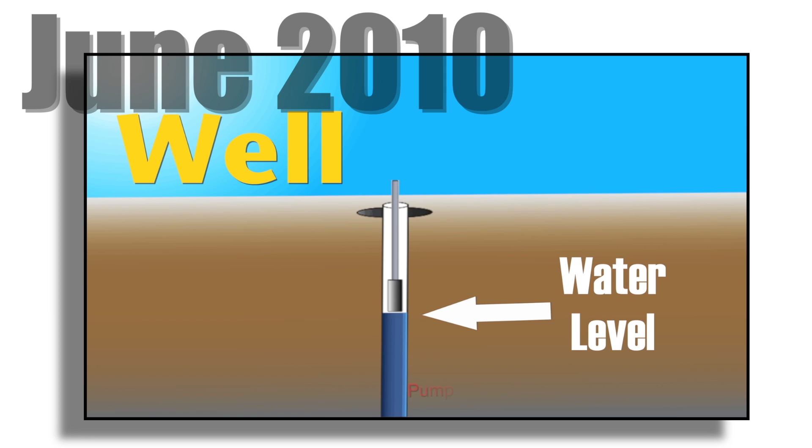In 2010, we began reporting on our dry well and what we did to fix it. Here's a flashback: we discovered our well pump could be lowered, so we added a 20-foot pipe link, and it worked for 3 more years. With the drought continuing, we now face the same dilemma, and this time we can't lower our pump because we're nearly at the bottom of our well.

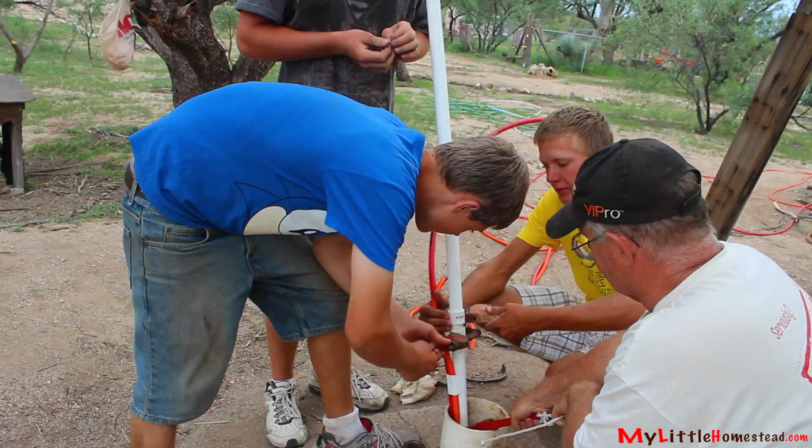In the spring of 2013, we began our 2-year journey to find a solution to our water problem. The first idea was a concept we learned online: dig a well using air and water.

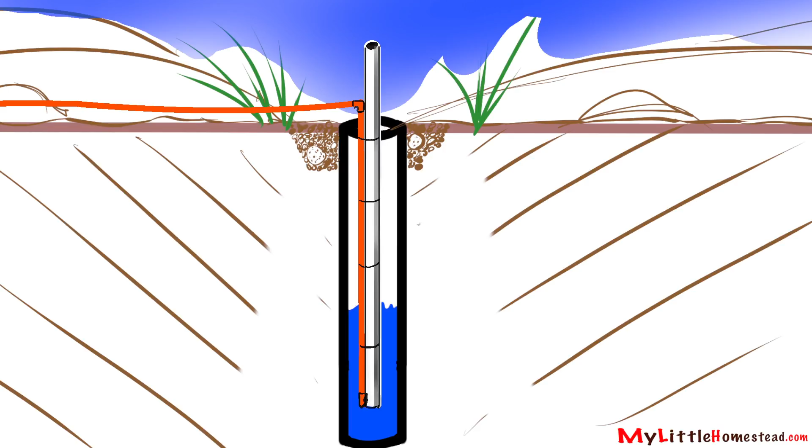A PVC pipe with an air hose attached to a compressor is dropped to the bottom of the well. Water is added to the top. The section at the bottom works like a vacuum, pulling up the debris, and the water carries the dirt up the pipe and spits it out the top.

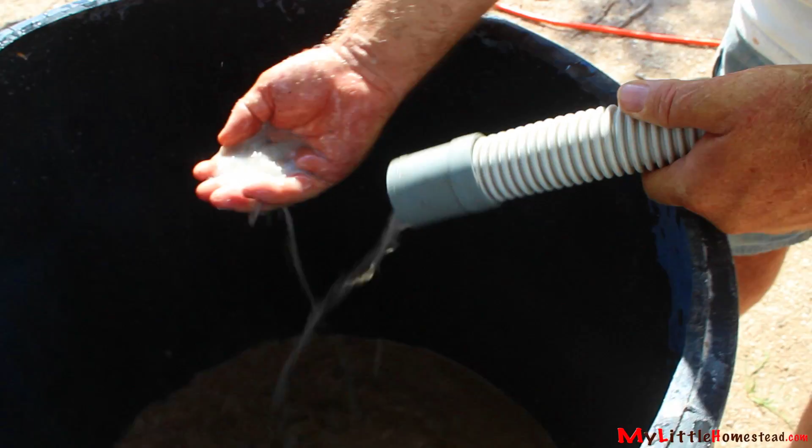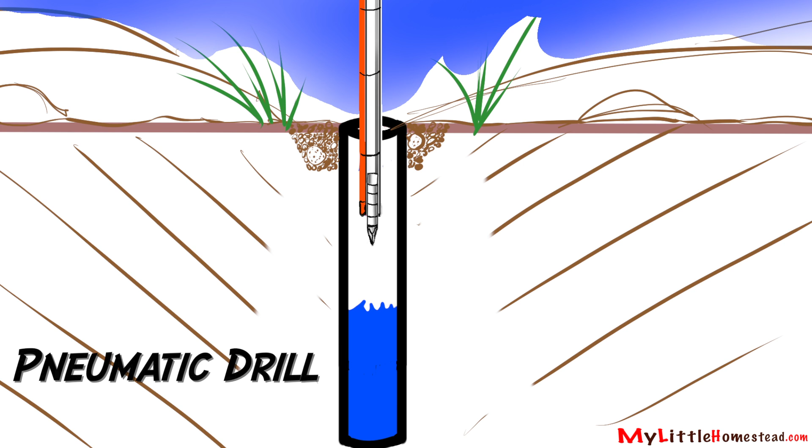We found this to work if we were dealing with loose sand at the bottom, but once we hit hard ground, it was no longer useful. The guys then made a pneumatic drill for the bottom of the pipe. This drill is not strong enough to get through rock, but it is useful for agitating the bottom of the well.

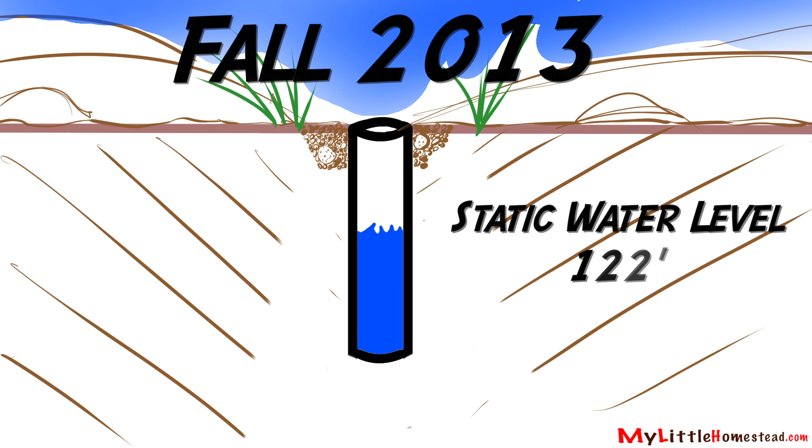This brought us to the end of the rainy season in 2013. We had not progressed in deepening the well, but learned plenty. The water level was 122 feet, and the recharge rate was 24 hours. The recharge rate is when you've taken water from the well, how long it takes for that water to recharge and get back to the level you started at.

We had no choice but to haul water, and lots of it. We hauled a trailer load of water once or twice a week.

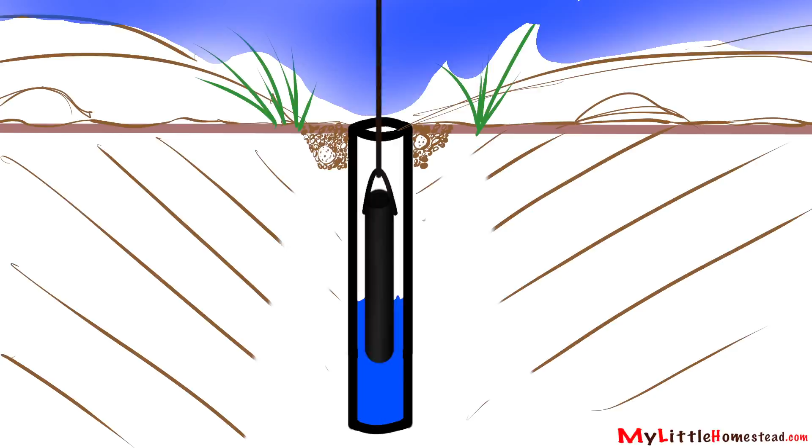Spring of 2014, the guys were back at it. The most effective drill was the percussion hammer. We used a 5-foot-long, 100-pound steel pipe that we picked up at a junkyard. Bryson used a small tractor to pull the pipe up and down.

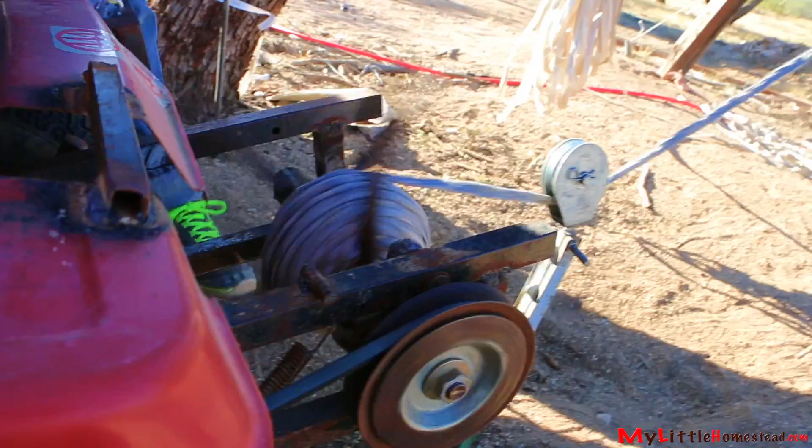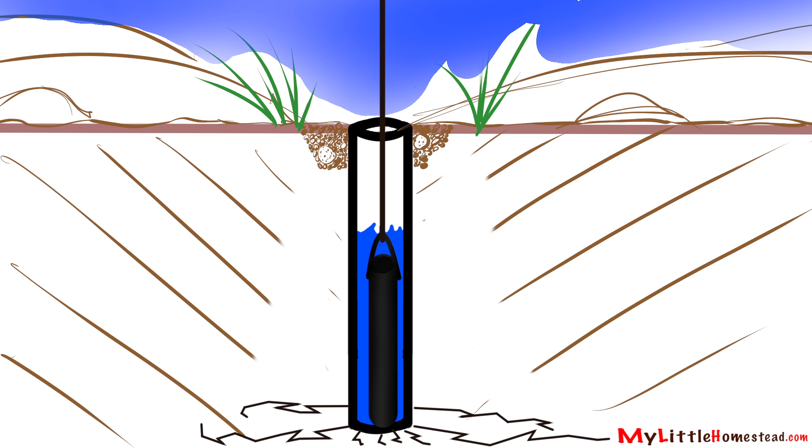He built a pulley system to the back of an old tractor. They even freely dropped the pipe, then fished it back up with a hook. Much time was spent retrieving it when it got stuck at the bottom of the well. The hammer was able to break through rock, but more importantly, create cracks in the ground around the well. The depth increased by 3 feet, but the water level continued to fall.

Meanwhile, Mom was taking a different approach, inspired by a man who lived in Africa. He used the ground on his property as a mass storage system for water. Over time, he was able to bring back water into all 3 of his wells.

One idea for slowing rainwater down and storing it in the ground is berms and basins. Berms are simply ground that is raised up, and basins are dips. We're having problems with this berm basin idea for a couple of reasons.

It doesn't matter how many berms and basins you have in place if you don't have any rainwater to slow down. The other problem was the 1 or 2 storms that would come in the year were so heavy and fierce that they simply ran over the top of the berms and filled in all the basins, and everything was level again.

When it rained really hard, we used to get water that would just rush up to the front of our house. We ended up doing a huge hugelkultur to try and hold back the water, and it's working really well.

Hugelkulturs are mounds made up of wood, cardboard, branches, and dirt, and can be up to 6 feet high. Once we discovered the hugelkultur mound worked, we combined it with basins and began to put something in place specifically designed to capture groundwater for the well.

We got to work quickly making as many as we could, doing this on the high ground up from the well. We picked up blocks for future building materials, and instead of storing them in one area, we lined them up to use for slowing water.

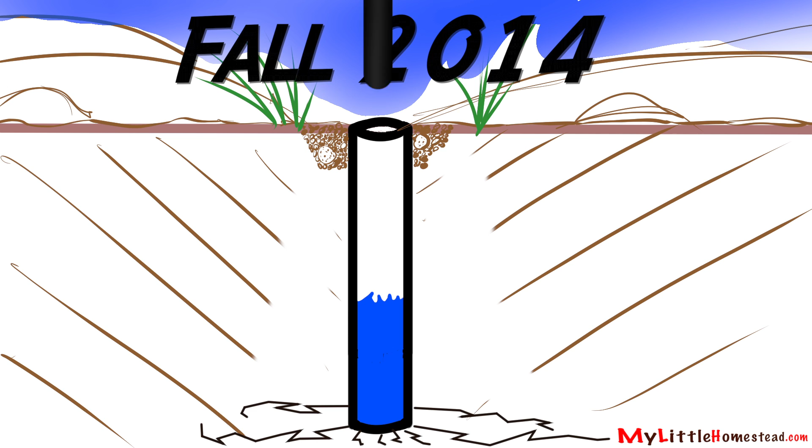With a combination of the guys pounding the ground and the hugelkultur holding more groundwater, our well began to come back. We discovered our recharge rate went from 24 hours to 30 minutes.

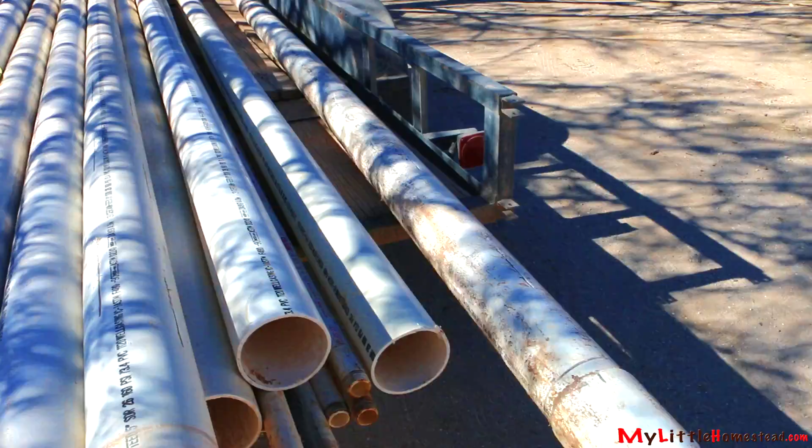With the well water coming back, we prepared the system. It was really difficult to find well casing small enough to fit inside the 6-inch well, about 1.5 feet from the bottom, so our pump will sit on it and never hit the bottom of our well. We got 5.5-inch well casing pipe off of Craigslist.

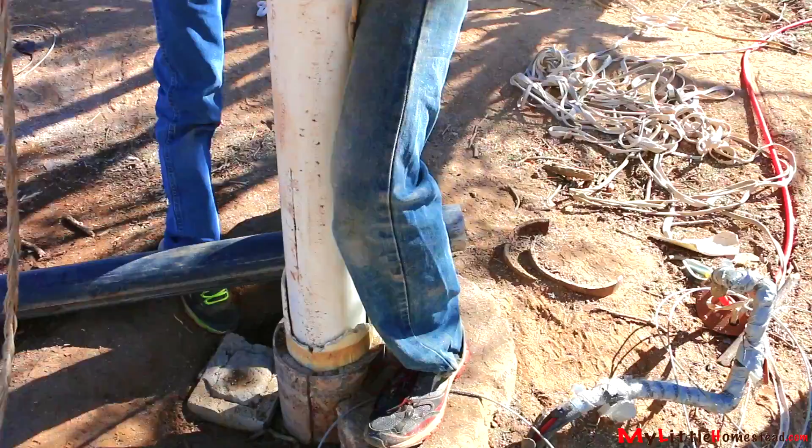Oh my gosh, is that like a perfect fit? Okay, we needed a smaller type pump that would fit inside our well, so we needed the 4-inch style, at 120 volts. We found an aquaponic timer because you need something that gets down to some pretty small numbers.

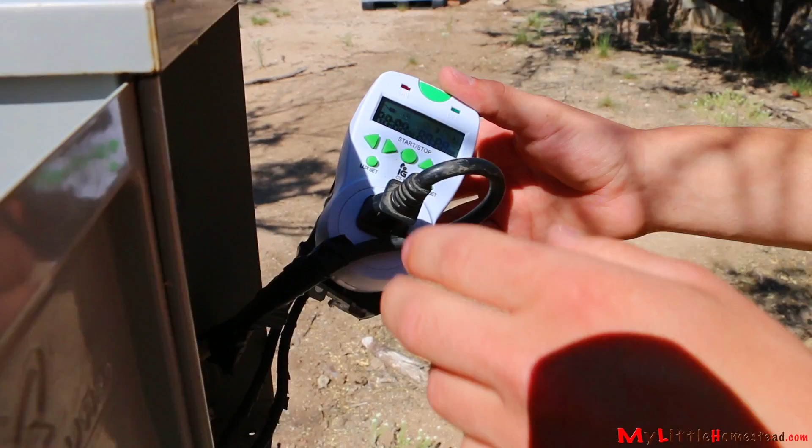Setting the timer to run 1 minute every 30 minutes meets our daily water needs. This means no more hauling water.

However, in the summer of 2015, before the monsoon season, our well slowed down. So we had to change this to 1 minute every hour, because we were starting to lose a little bit of water. So we had to haul water again to supplement, small loads throughout the summer months.

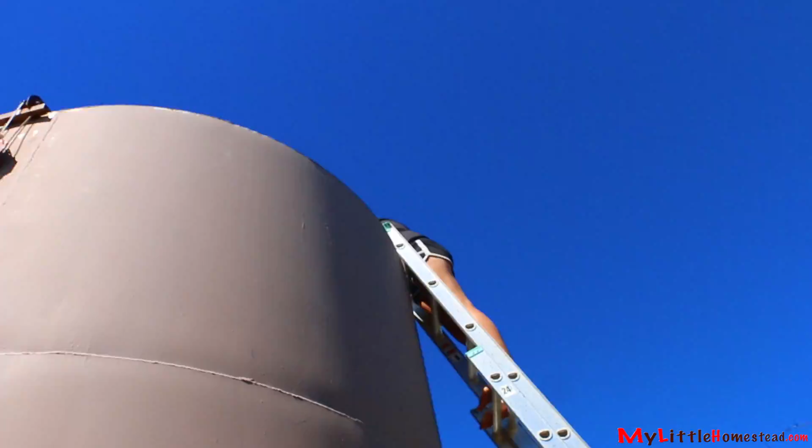Running your well dry is not good for it. How's the water level look? Looks better than yesterday.

This brings us current, September of 2015, and we had a crazy monsoon season. These basins have filled several times. To show you how much water we have over here, it's to my knees almost.

This is the morning after, and you can see, much to our delight, that there is no more water pooling. All of it has soaked into the ground. And this one, which was by far the deepest, has soaked in too.

To show you how good it is, we're not watering these melons at all, and they're just popping up. As you see, there's green everywhere, and you'll notice how, even without watering them, they grow. It's like a garden without water.

Oh my gosh, you shouldn't really step on these, but you'll notice it sinks. It's quite interesting actually how it sponges.

Yep, you guessed it, our well is back up and running 100%. Is this the end of hauling water for good? Oh, only time will tell, but we're hopeful.